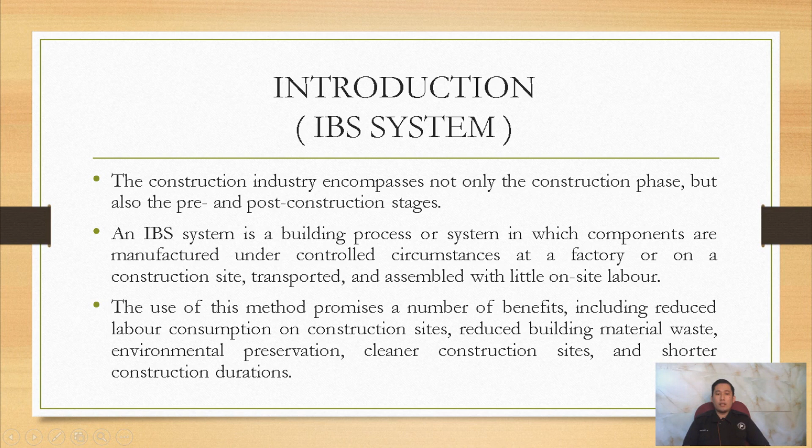The use of this method promises a number of benefits, including reduced labor consumption on construction site, reduced building material waste, environment preservation, clean construction site, and shorter duration of construction.

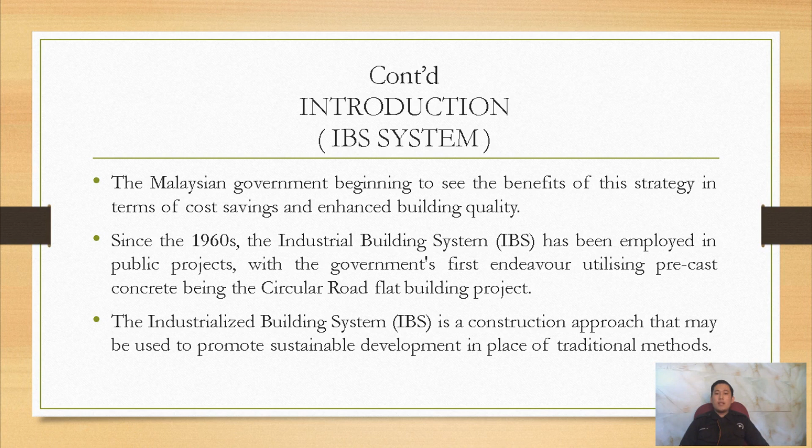In Malaysia, the government began to see the benefit of this strategy in terms of cost saving and enhanced building quality. Since the 1960s, IBS has been employed in public projects, with the government first utilizing precast concrete being the circular road flat building project. IBS is a construction approach that may be used to promote sustainable development in place of traditional methods.

For the case study we chose for this assignment, it is Medical Center Hospital Serdang, Selangor, under the Ministry of Health. The construction site has 129,000 square meters. The building has 9 floors with 620 beds. The construction uses a hybrid IBS structure of steel frame, precast concrete slab, and lightweight concrete block for walls. The duration of construction of the structure only took 4 months to complete.

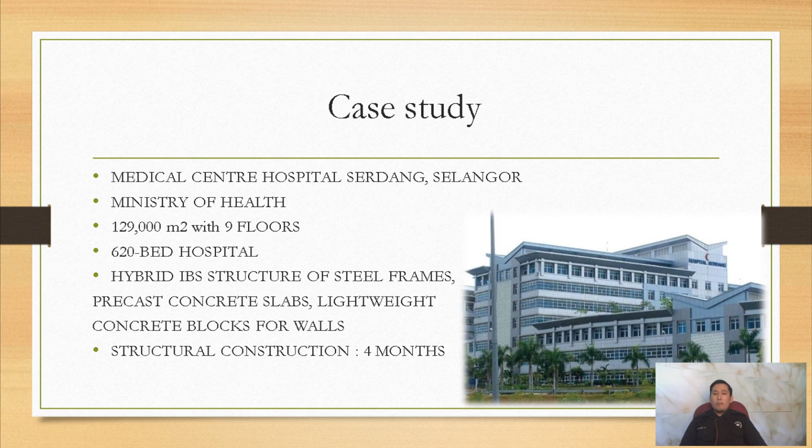The construction cost is 690 million Ringgit Malaysia. After construction was complete, they started operation in December 2005. This hospital is located near Putrajaya, the Malaysia Federal Government Admin Center, built to serve the population of Serdang, Putrajaya, Kajang, and Bangi, Selangor.

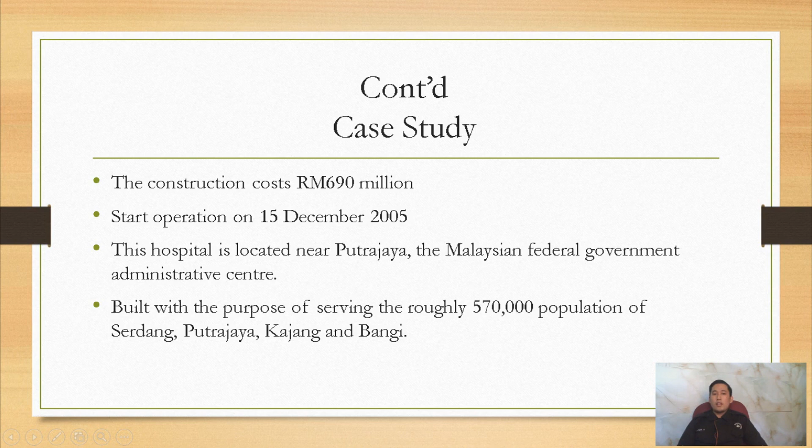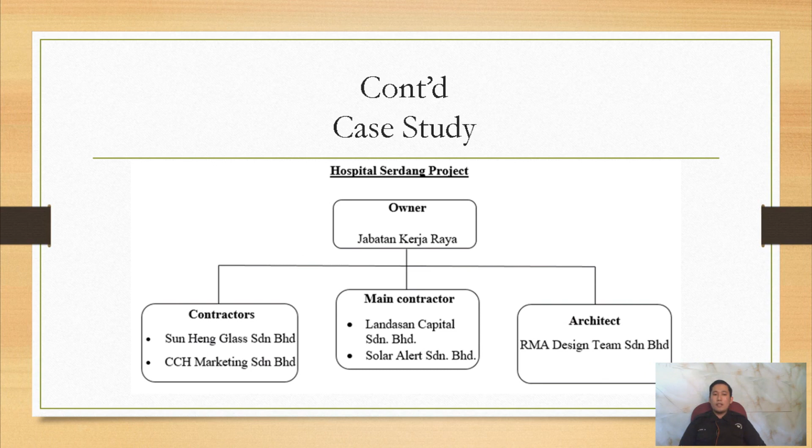This hospital project is owned by Jabatan Kerja Raya. The architect is RMA Design Team Sdn Bhd. The main contractors are Landasan Capital Sdn Bhd and Solar Alert Sdn Bhd. The contractors are Sun Heng Glass Sdn Bhd and CCH Marketing Sdn Bhd.

Concept and framework: precast concrete half slab. Many precast or semi-precast concrete slab systems based on pre-tensioned concrete elements are available on the Polish market. The first group are beam and block systems consisting of beams spaced at a maximum of 600mm and filling bricks made of light concrete, ceramic, or even wood waste. The second group are systems consisting of large size elements, hollow core slab or TT plate. Each of these systems has its advantages and disadvantages.

The first group does not require tight formwork or heavy equipment, but they are time consuming in assembly, are not rigid enough for long span, are of pretty big height, and transfer noise with low mass. The large size slab, although fast in assembly and not requiring large amounts of wet concrete, is quite expensive in transport and assembly.

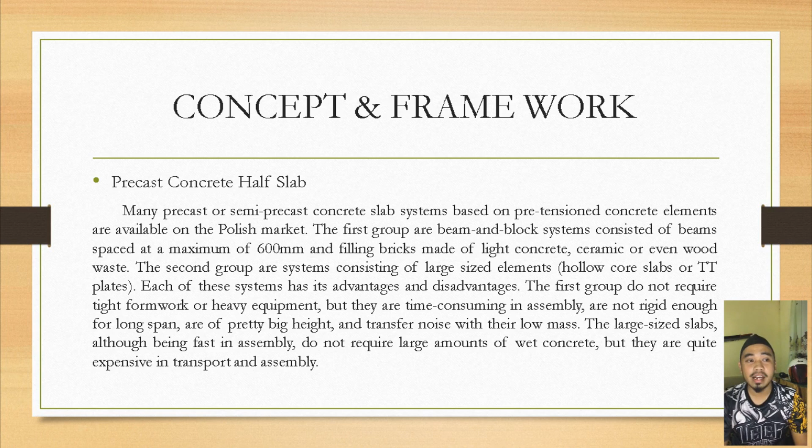Steel beam and column: steel frame is a building technique with a skeleton frame of vertical steel columns and horizontal I-beams constructed in a rectangular grid to support the floor, roof, and wall of a building, which are all attached to the frame. The development of this technique made the construction of skyscrapers possible.

The rolled steel profile or cross-section of a steel column takes the shape of the letter I. The flanges of a column are thicker and wider than the flanges of a beam to better withstand compressive stress in the structure. Square and round tubular sections of steel can also be used, often filled with concrete.

Steel beams are connected to the column with bolts and threaded fasteners, and historically connected by rivets. The central web of the steel I-beam is often wider than a column web to resist the higher bending moment that occurs in beams.

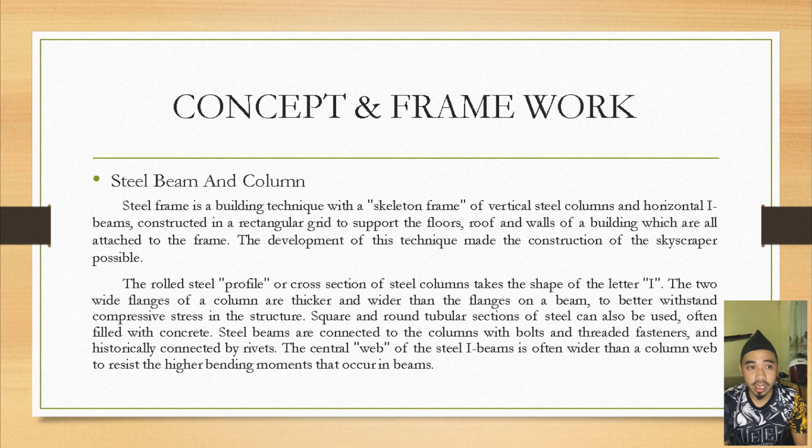Hello, greetings everyone. I am Jade. Now I want to talk about the features and fabrication of the Hospital Serdang building.

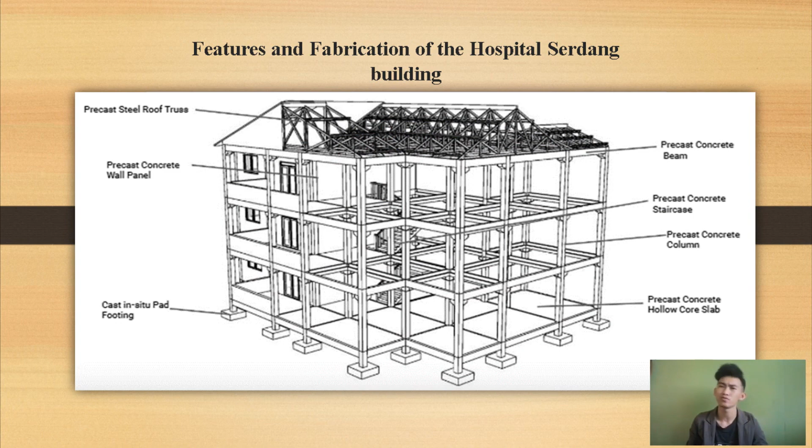Now we're going to the components of the building. The component of pad footing is a shallow foundation that carries and distributes a point load to the ground safely, where the ground floor slab system is made of bars, fabric, and some highly stressed sheet. For the hollow core slab, it is a precast sheet of pre-stressed concrete that is widely used in multi-story apartment or hospital buildings.

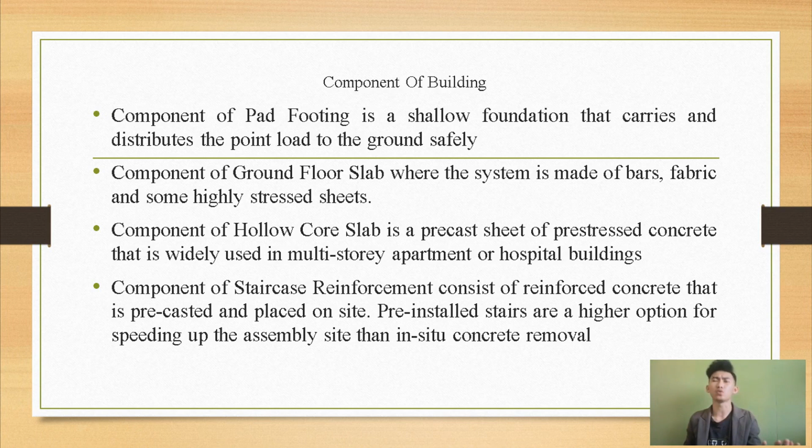The component of the staircase reinforcement consists of reinforced concrete that is precast and placed on site. Pre-installation stairs are a highly favored option for speeding up site assembly compared to in-situ concrete pouring.

Other than that, the component of prefabricated steel roof truss reinforcement is the most popular system for long-term roof support. It offers high strength and a lightweight roof system that minimizes on-site installation time.

The component of concrete wall panels can vary in form and exposed aggregate finish, which is highly ornamental, with a face finish similar to cast-in-place concrete, yet it can save installation time on site. For the beam and column, it provides a flexible solution as a structural component for the project.

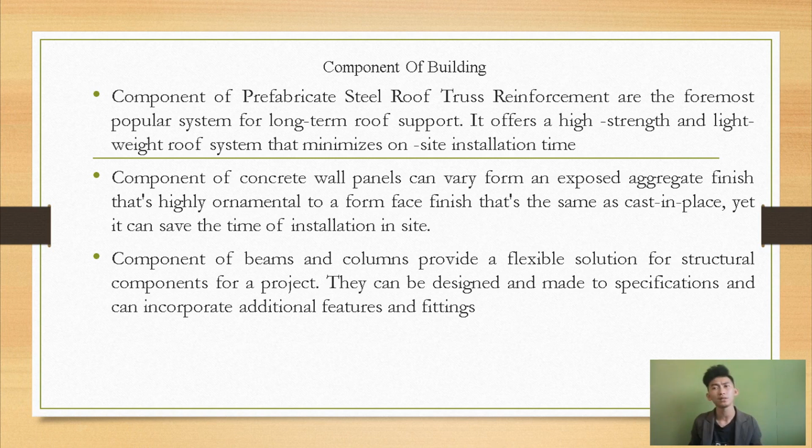They can be designed and made to specification and can incorporate additional features and fittings. So this is the procedure for installation of IBS components on a building.

The procedure includes excavation, cast in situ foundation, ground floor beams, installation of slab and column, first floor beam, solid wall panel installation, hollow core slab, precast concrete staircase, first floor installation, second floor installation, purlins installation, and finally the roof installation.

For the fabrication process and suitability of various components on a building, such as the beam and column, the mold of the column and beam are assembled and the dimensions of the mold are within specific tolerance.

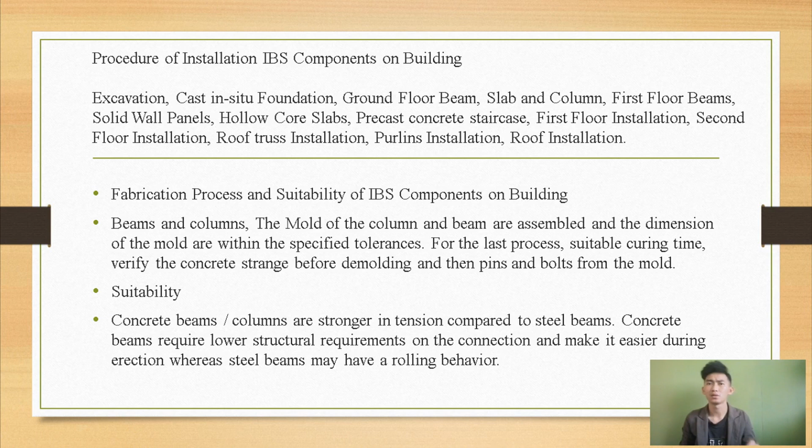For the last process, suitable curing times are applied, where the concrete strength is verified before demolding and then removing pins and bolts from the mold. It is very suitable because the beam or column is strong in tension compared to the steel beam.

For the hollow core slab, concrete is transported from the batching and mixing plant, then poured and formed around the reinforcement, forming the slab. After quality control, the concrete is ready for delivery and installation.

On site, it is very suitable because the hollow core in the slab also allows the insertion of reinforcing rods that connect to the concrete wall, strengthening the structural integrity of the two components.

For the staircase, the mold assembly is made of wood molding, and the mold is then cleaned and ready for the next manufacturing stage. It is suitable in strength with concrete, making it a preferred material.

Reinforced with rebar, the precast concrete structure's integrity and reinforcement is preferred over in situ as it saves construction time and also saves space on site.

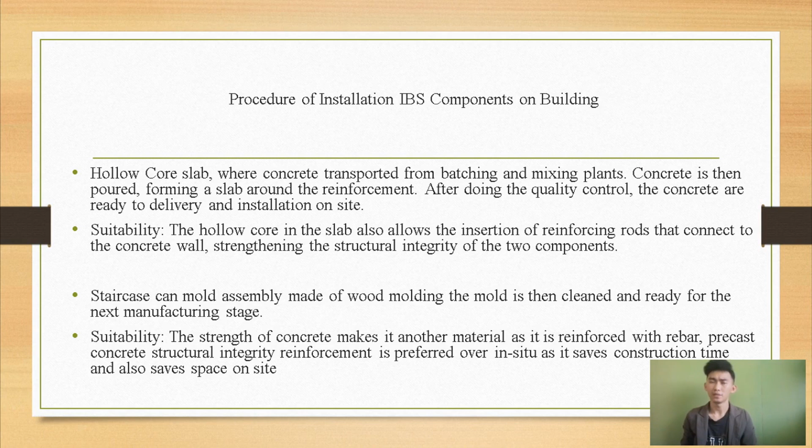For the roof truss, metal strips are inserted with automatic color into a rust container, then bent by rolling the container into a C-channel steel profile. This is followed by cutting, punching, and measuring the C-channel steel profile to precise dimensions, assembly of individual parts to make the roof truss, and connecting all parts using manual latches and screw guns.

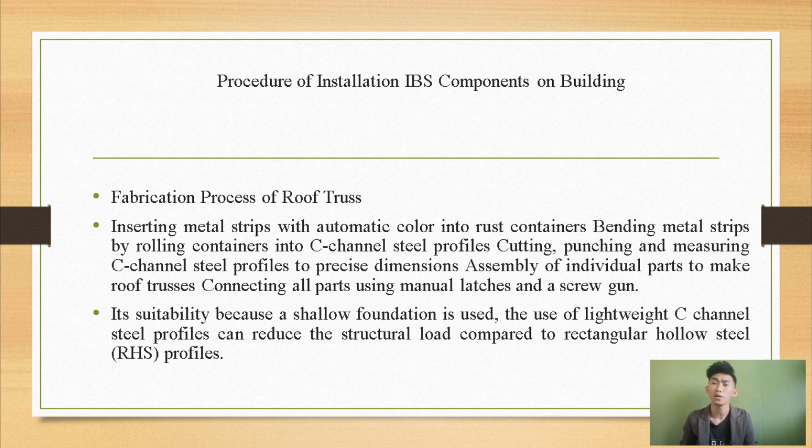It's suitable because a shallow foundation is used. The use of lightweight C-channel steel profile can reduce the structural load compared to the rectangular hollow steel (RHS) profile.

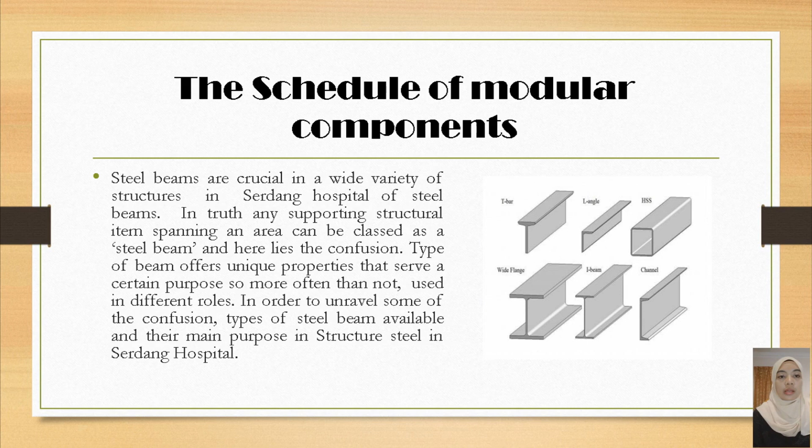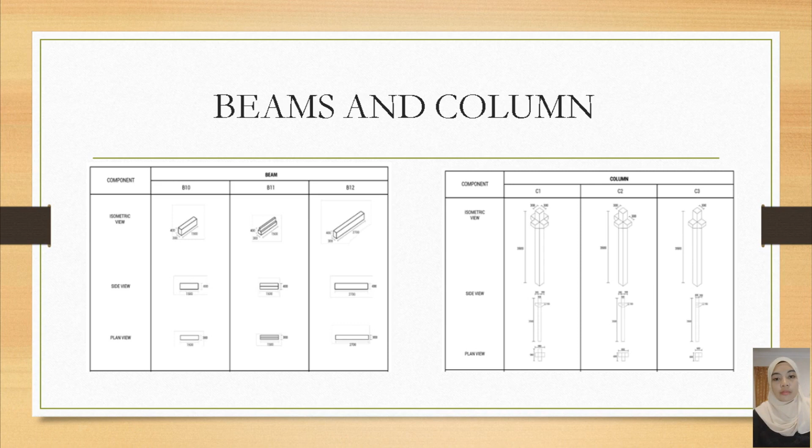The column also has an isometric view, side view, and plan view. There are types of columns: circular column, composite column, and L-shaped columns.

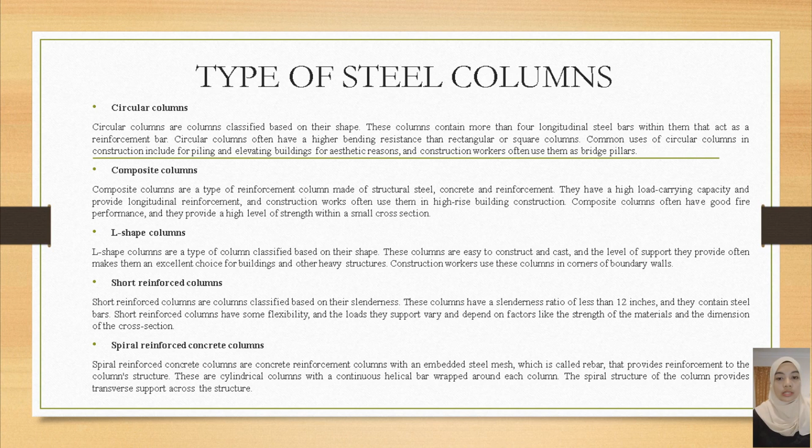There is also reinforcement column, and for the spiral reinforcement concrete column, there are a few types using steel beam and column.

Next is the precast hollow core slab. There are a few uses for the hollow core slab, the precast hollow core slab at Hospital Serdang.

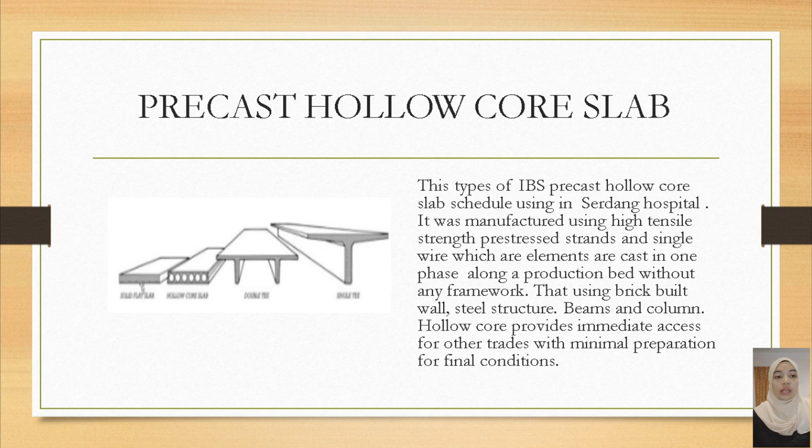Next, I'm going to present about the IBS score calculation for Hospital Serdang. The construction area involves 9 stories of floor, including the roof area. The area for one floor is 276.5 square meters, and for the roof is 341.8 square meters. The total construction area is 2,830.3 square meters.

For structural systems: for beams, precast concrete beams are used, as well as precast concrete columns. For floor slab, precast hollow core floor slab is used. Lastly, for roof truss, prefabricated steel roof truss is used.

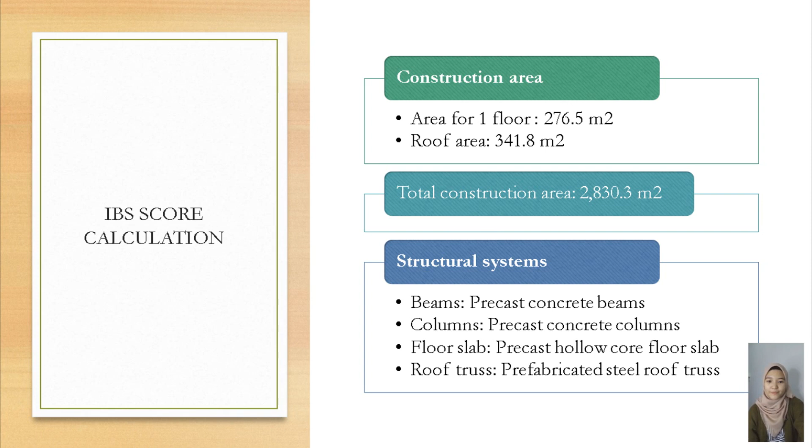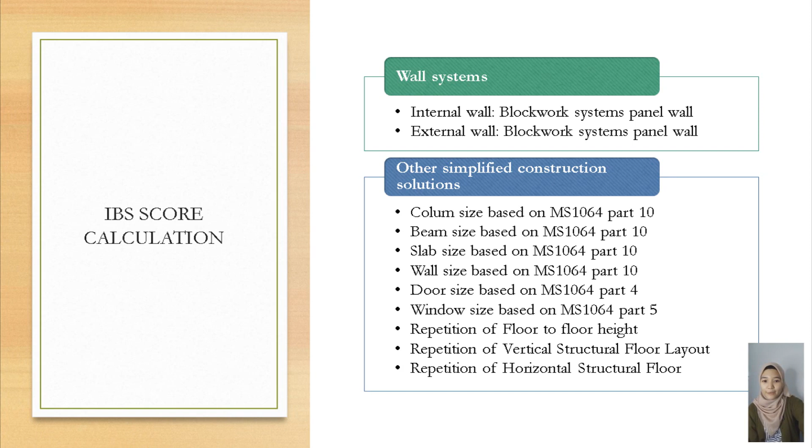For systems, both internal and external use blockwork systems, panel wall, and other simplified construction solutions like columns, beams, wall, door, and so forth, based on MS 1064.

Now I'm going to explain IBS score Part 1, which is structural elements. The area for precast construction system like beam, column and hollow core slab is 276.5 square meters, as I said just now, times 9 stories.

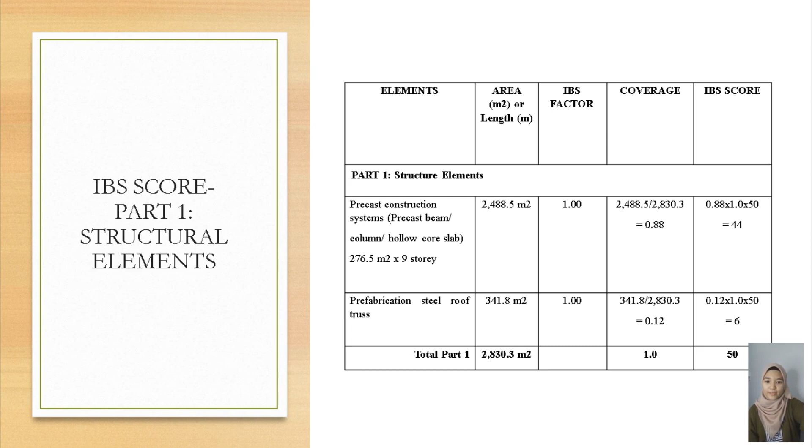Then we get 2488.5 square meters, followed by prefabricated steel roof truss, which is 341.8 square meters. The total is 2830.3 square meters. The total for Part 1 is 50 points.

Next, moving to Part 2, which is wall elements. Hospital Serdang uses blockwork systems for each wall. After calculation, the IBS score is 10 points.

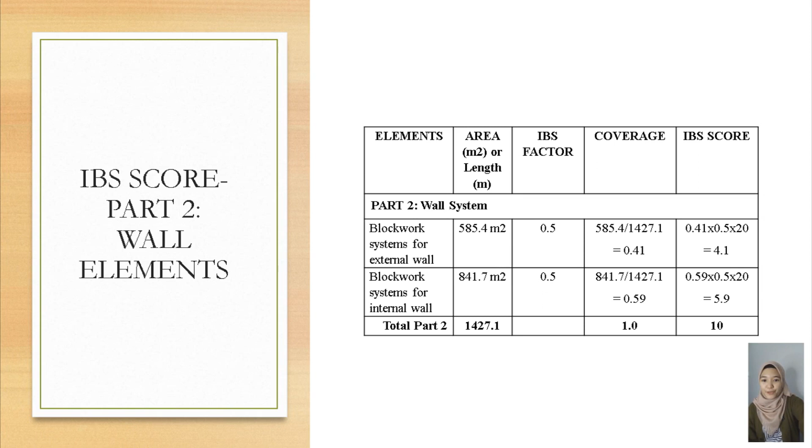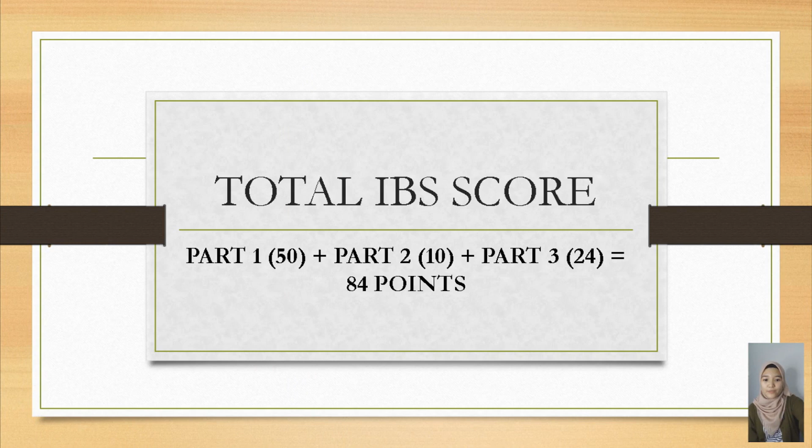Lastly, under simplified construction solution, the IBS score is 24 points. After totaling up the points, Hospital Serdang got 84 points for the IBS score.

In conclusion, IBS shows a building technology that emphasizes great quality output while requiring few workers. The implementation of IBS promises to transform the construction sector at all levels into something successful and professional. IBS can increase the market share in the construction industry as well as contribute to the Malaysian economy.

IBS should be true to a modern form of building that employs current systematic design process, production planning and manufacturing method, and mechanical erection.